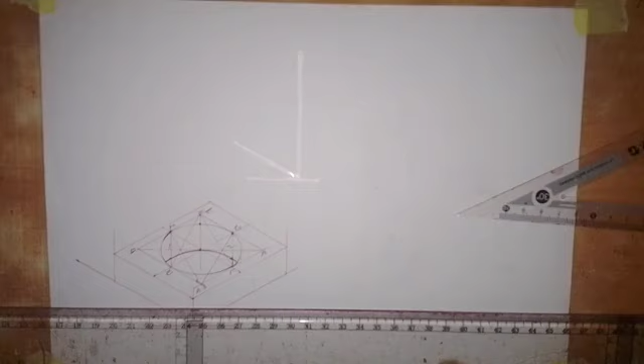Welcome to my channel. Here we are going to work on the construction of an isometric circular hole on an isometric block, on the left face of the block, similar to what we did on the top face earlier. Let's see how this construction can be done.

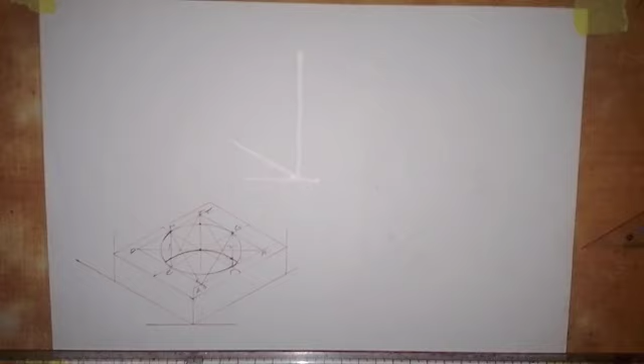First, I take my set square and draw a line in this direction, then at this point I draw a vertical line here. Having drawn this vertical line, I take a measurement of 15 millimeters from this point forward.

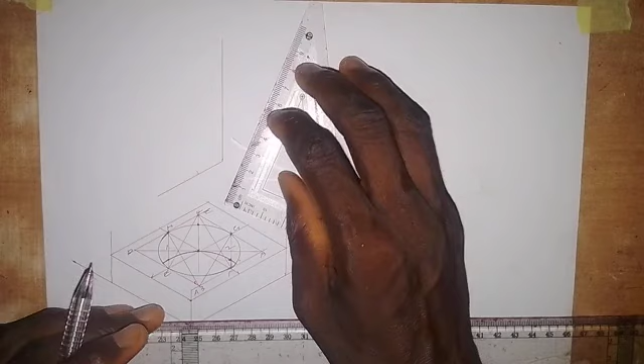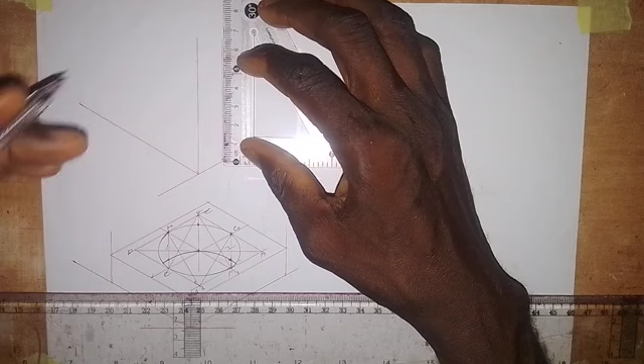I draw a line from this point in this direction. At this point here, I also draw a vertical line, and then I take a measurement of 60 millimeters from this point.

Then on this side, I take a measurement of 50 millimeters. So at this point here, I draw a vertical line like this.

Then I transfer this 60 millimeter distance onto this line, turning the set square to transfer the point. From this point I draw a line in this direction, and then I transfer this other point here as well.

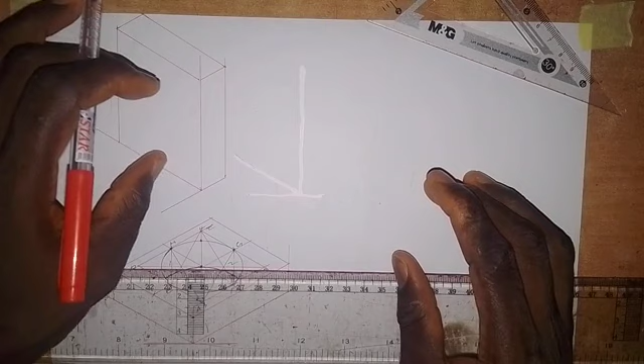So here we have an isometric block. We are constructing the isometric circular hole on this face here, which is the left face.

Now we are going to divide this 60 millimeters into two equal parts, giving us 30. Then we come here to this 50 millimeters and divide it into two equal parts, giving us 25 millimeters.

At this point here, I draw a vertical line on this face. Then I turn my set square like this and draw a line in this direction from here to here.

The diameter of the circular part of the isometric hole we are making is 40 millimeters. So we need to construct an isometric square on this face whose length will be equal to 40 millimeters. How can we do that?

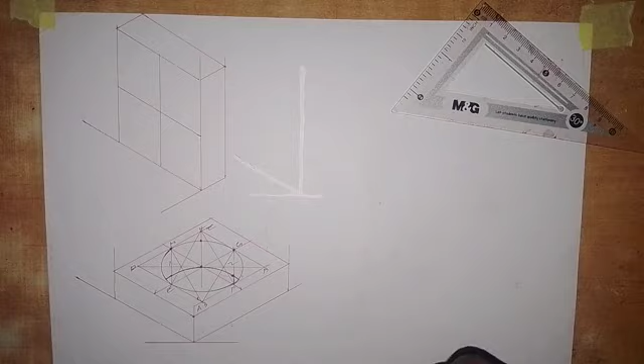Come to the center here. With the center here, take a measurement of 20 millimeters to this side, and then 20 millimeters to the other side. Then set it vertical like this, taking 20 millimeters down and 20 millimeters up from the center.

So we are going to create an isometric square on this face now. We draw this line in this direction and come up here, drawing a line from here to here. Then we set the set square like this and draw a vertical line, bringing it to this point here also.

So we have this square. Now we are going to label these points: this is point A, this is point B, this is point C, this is point D, this is point E, this is point F, this is point G, and this is point H.

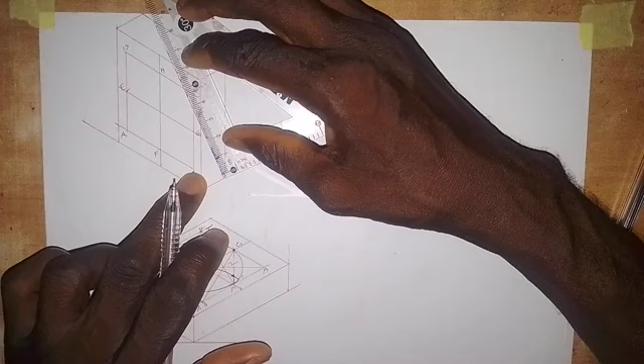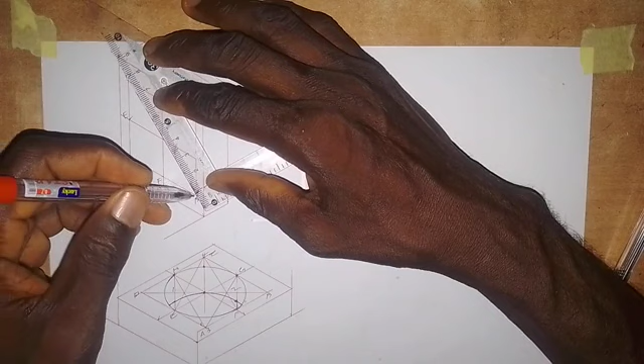Having labeled the points, the first thing we do is connect the longest corners together, drawing the longest diagonal. That means connecting point B and D together with a straight line, like this.

Next, we connect point A with point H, and connect point A again with point G, so it goes like this. Then we connect point C with point E, and then C again with point F.

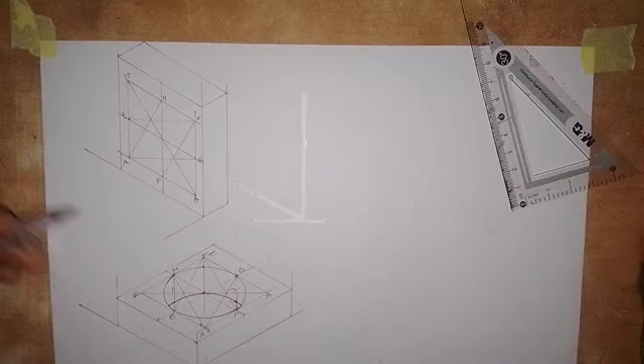Alright, so we are using the four center method, so that's what we have done here. This is center 1, this point is center 2, this is center 3, this is center 4 at C, and center 3 is at A.

Now we take the compass, put a pinpoint at center 1 here, and extend it to H. We want to draw an isometric circle first, as we have done here. So we check, and we can take from here, draw this arc, just take it easy, so it goes like this to point H.

Then we put our center 2, so we check, and take from this center, from this point F to G, so it goes like this. Alright, so we have this now.

Then we put our center 3, which is point A, extend it to point G here, and draw this arc to touch this. Then we put center 4, which is point C, and draw from this point down like this. So we have an isometric circle on this left face of an isometric block.

Now the next thing we are going to do is construct an isometric circular hole. Because of the thickness of this block, we should be able to see the other part at the back, a little part of it. So how can we do that?

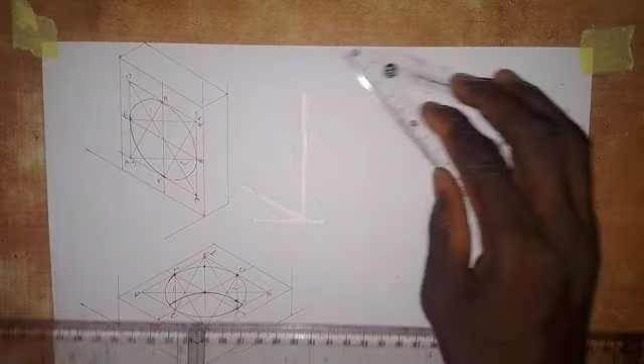Just look at what I'm going to do. Take your set square. What will make us able to see the other part at the back of this circular hole is the wideness of the isometric circular hole. As this one is wide, you should be able to see the other part, coupled with the thickness of the isometric block. So that is what we need to consider.

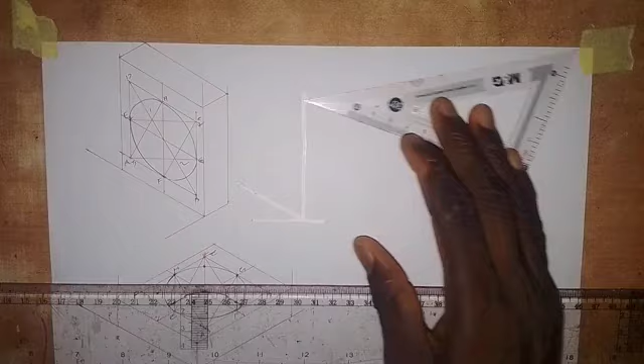So the first thing we do to draw the other part is from this point E here, draw a line into the block. Then from this point A, we draw a line into the block like this. Then we come to point F here, and draw a line into the block like this.

Alright, so the next thing is that from point F here, we take a measurement, since the thickness of the block is 15. So we take a measurement of 15 millimeters. Just set your ruler like this and take 15 millimeters inwards.

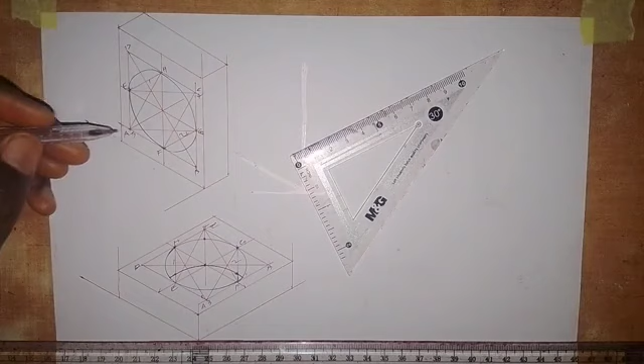This is 15 millimeters. Then come to this point, not point A, but the point where this line touches this arc is what we are using. So we have this point here on this arc. Take a measurement of 15 millimeters inward on this line, exactly at the center here.

Then we come to this point E here, and take 15 millimeters inward. So from point E, take 15 millimeters inward, this is 15 millimeters here. So these 3 points are very, very important: this point, then this point here, and then this point.

Okay, with the French curve, we join the 3 points together. Just set the French curve like this, looking at the way I'm setting it, so the 3 points are aligned on the edge of the French curve. Then you draw from here, just draw like this.

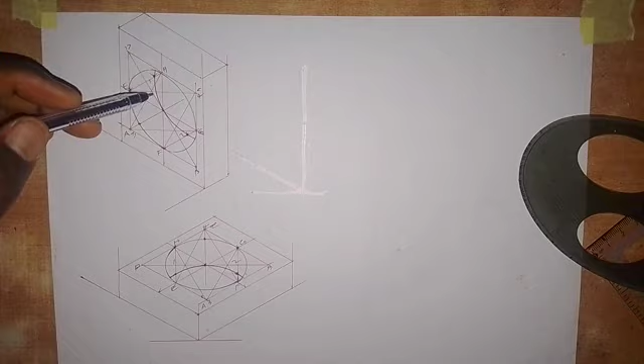Alright, so you can see this is the other part of the isometric circular hole, which is at the back of the block. As simple as I've done it here, all you have to do is practice, and with practice you become a master at this work.